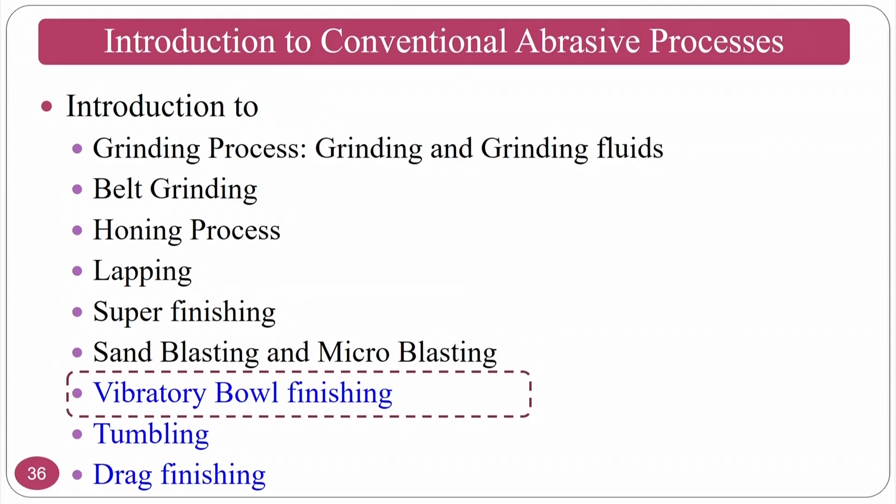The next process we will study is vibratory bowl finishing. This combines abrasive machining with mass movement of abrasive media. It's a mass finishing process where you dump parts in a batch—say 50 or 30 parts as per requirement—then give motion to the machine. Abrasive machining is taken in a mass spectrum, altering the peaks and valleys of the surface, thereby altering the surface finish of the workpiece, essentially shearing the workpiece peaks.

At the same time, it sometimes burnishes as well. So there are two options: it can shear off the surface peaks, or if the peaks are very small, it can do burnishing instead. Using abrasive medium and vibrations, you get a better surface finish in the vibratory bowl finishing process.

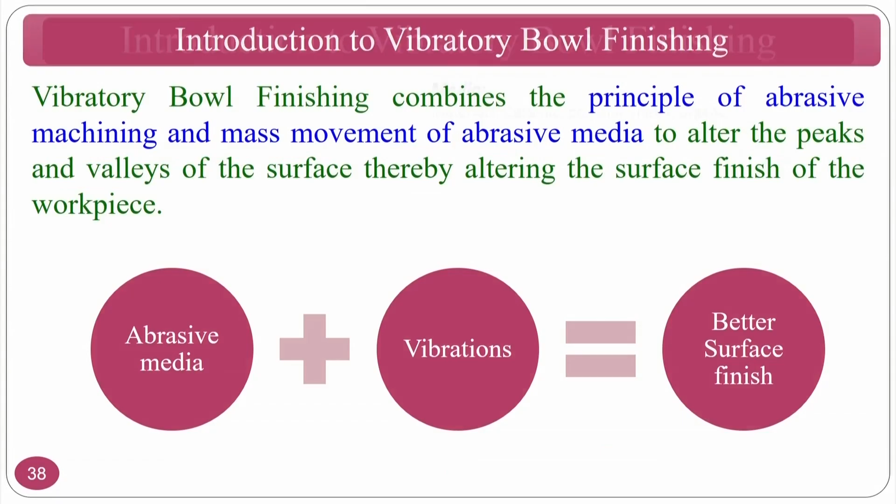A vibratory bowl finishing machine is an open top tub, round or oval bowl mounted on springs, usually lined with polyurethane, containing the work. This coating inside will normally be polyurethane, because polyurethane is a soft polymer.

Even though the workpieces are harder, if you have a metallic surface there would be chances of dimension changes at a nano or micro level. The media normally uses materials like ceramic, polymer, or metals, or organic, in shapes like cylindrical, pyramidal, or triangular, sized up to 25mm. For example, ceramic or metal particles of cylindrical shape up to 25mm can be used as the medium—these are the particles used inside the vibratory bowl finishing process.

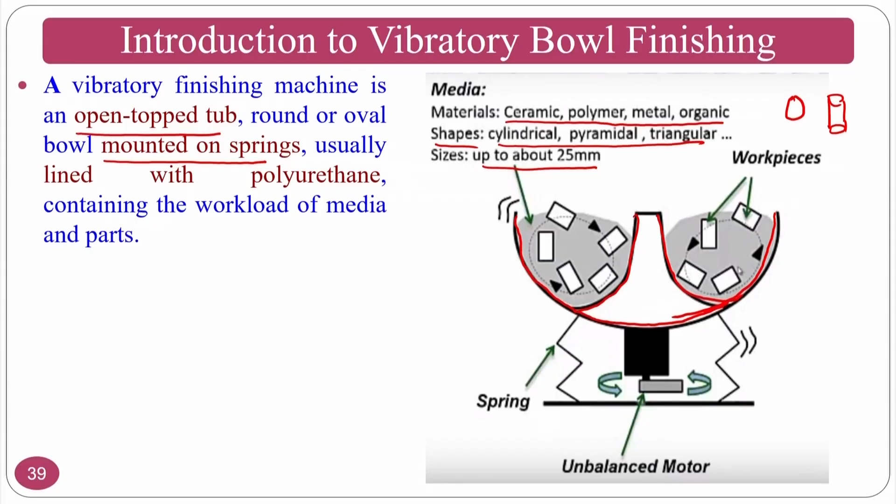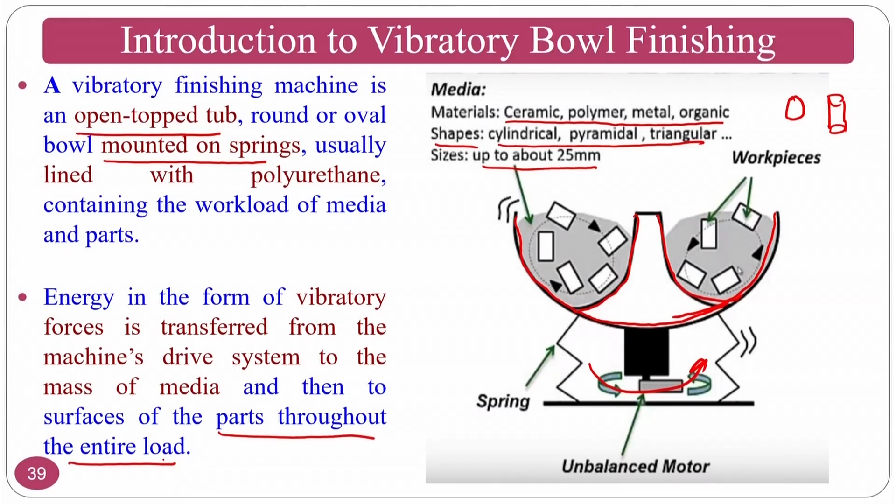Energy in the form of vibratory forces is transferred from the machine drive system to the mass media. The drive system here rotates, and this energy is transferred to the media, and through the media to the entire load of workpieces. These abrasive particles continuously indent and try to shear with respect to the vibrations given to the bowl. The abrasive particles carry and gain this energy, hitting the workpieces and shearing the surface peaks to achieve a better surface finish.

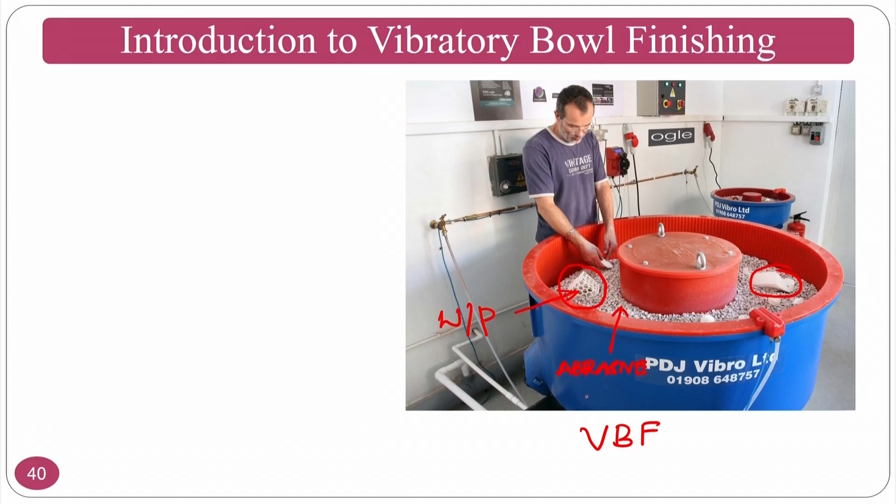This is how the vibratory bowl finishing process setup looks. These are the components placed here, these are the abrasive particles, and these are the workpieces.

Vibratory motion is induced by an eccentric weight system mounted on the drive mechanism—you will see this in the upcoming slides. Normally there is a weight system at the bottom, with the eccentric weight system below, and on top of it vibratory motion is given. By adjusting the degree of eccentricity—the amplitude—and the drive speed, that is how much speed or frequency, you can shake the vibratory bowl and transfer these vibrations to the particles, then to the parts.

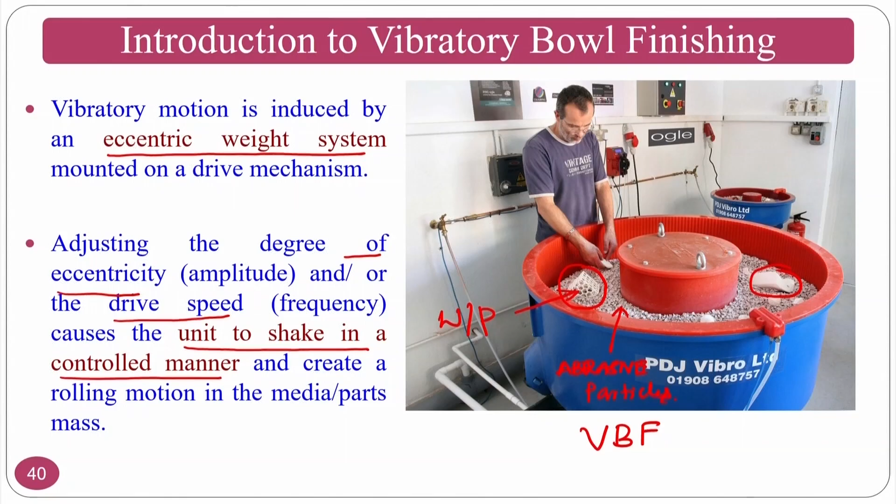In this machine tool, you can see the polyurethane here, the second part here, and the third part slightly below. The polyurethane lining is normally a high quality elastomer polyurethane, because the workpieces should not get hurt by metal or ceramic. If you coated this liner with metal instead of PU, it would damage the components because the interaction forces would be very high when rotating at very high speeds.

Normally the vibrational motor operates slightly off-center due to eccentricity. It has a direct drive steel cased motors, especially imported bearings, and an external lubrication system with high level performance. Normally the vibration motor gives the rotary vibrational motion.

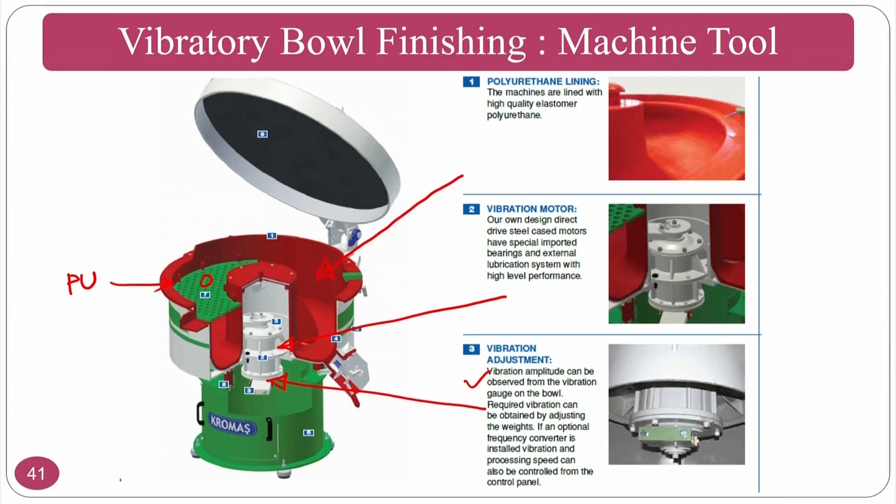At the same time, the vibration adjuster is used for changing vibration amplitude. If you want to change the vibrations or load and other things, you can go for this adjusting system.

In the other machine parts, normally the bowl, before coating inside, will have a heat treatment on the metallic component. On top of it you will have a polyurethane coating. This is the area where the polyurethane coating is done inside, and shot blasting is also done on this, because all metal surfaces are shot blasted for added strength.

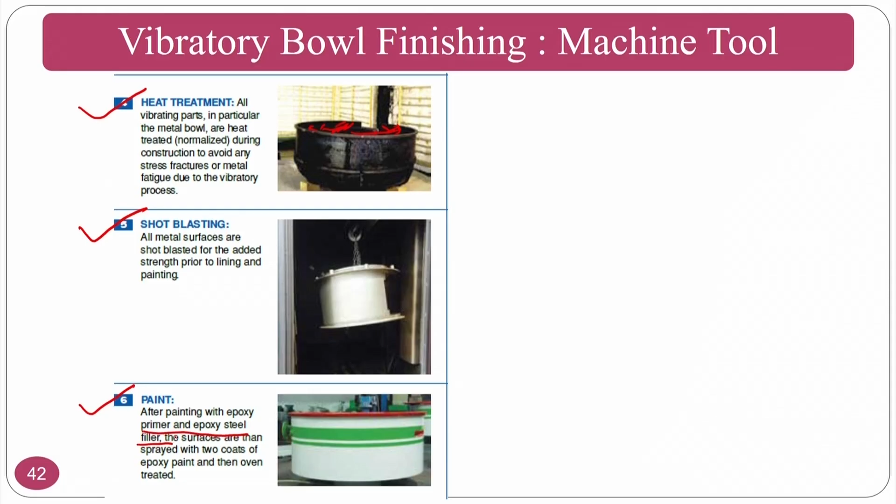Normally, if heat treatment alone is not sufficient, then you have to do sand blasting or some other blasting so that it gains more strength. At the same time you have to go for proper painting with epoxy primer and epoxy steel filler and other things, so that it gets a soft touch for the components that are moving or hitting the surfaces. On top of it you go for many other coatings and things.

At the same time, a suspension system is required because you are always dealing with vibrations and other things, and you require this suspension system.

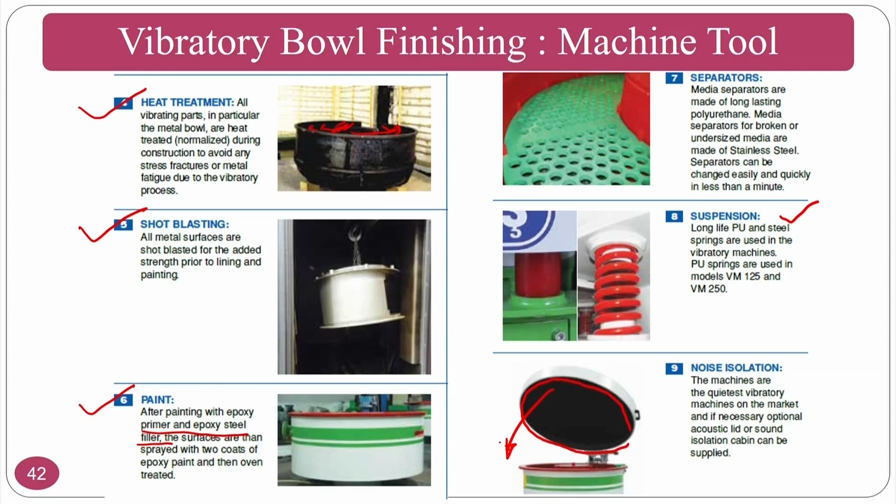And noise isolation—you should go for noise isolation like a very closed system, so you can do the closing. Noise is one of the major drawbacks of this vibratory bowl finishing process. If you close the system, the noise generated by the vibrating or moving particles can be minimized.

So if you see these operations, these are normally all the components that are finished using the vibratory bowl finishing process. Commonly it is used for cleaning applications, deflashing of components, and conditioning of castings and moldings, because the molds need very critical surface treatment. If you put these inside the vibratory bowl finishing process, the abrasive particles reach every nook and corner of complex molds and create a good surface on top.

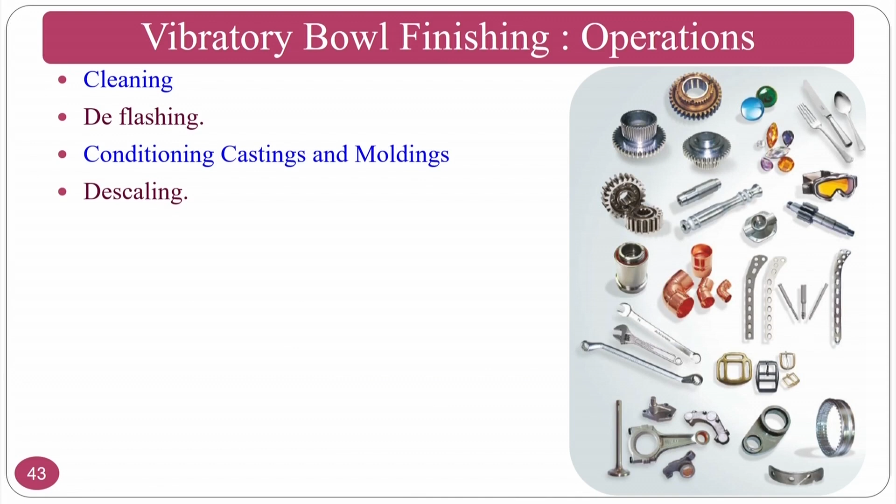Descaling can be done if there are any scaling problems, and removal of rust and brazing residues can also be done.

And burr removal—if you have any burrs after machining operations like drilling or milling, you can remove these.

Generation of radii, material removal, and size reduction can also be done. If I want to generate some radius because sharp edges are difficult to handle—a sharp edge component may damage my fingers—for that purpose you can generate a radius so the component is easy to handle.

Surface finish—obviously this process is normally used for mass finishing, meaning surface finishing of many components or varieties of components in one go, and normally this is done for batch production.

And improvement of burnishing preparation—if I want to do a burnishing operation, you can do a pre-burnishing operation using vibratory bowl finishing so the burnishing is easier later. Polishing of plated parts and silverware can also be done. At the same time, developing lubricative surfaces like honing—the lubricating surface crosshatch patterns generated in honing can also be generated by this process.

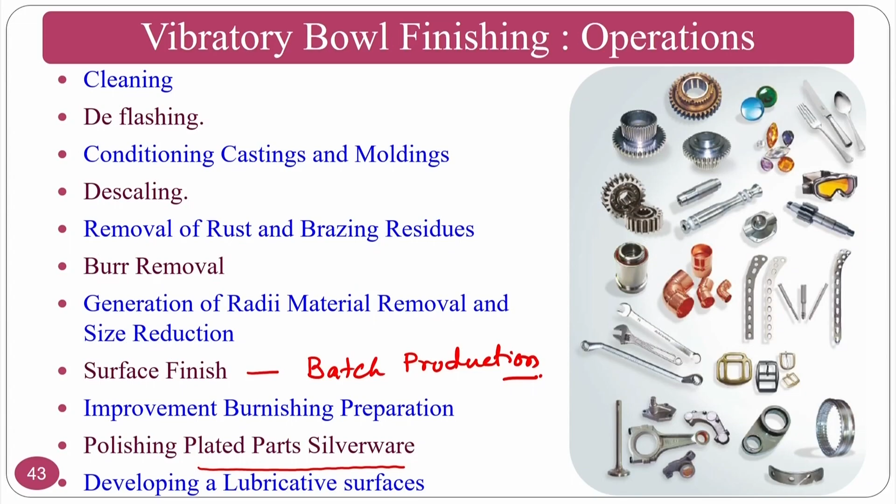Vibratory bowl finishing surface control: if I want to control the surface, the greater the speed or amplitude of the vibration process, the faster the material removal, but the surface roughness you get will be very rough.

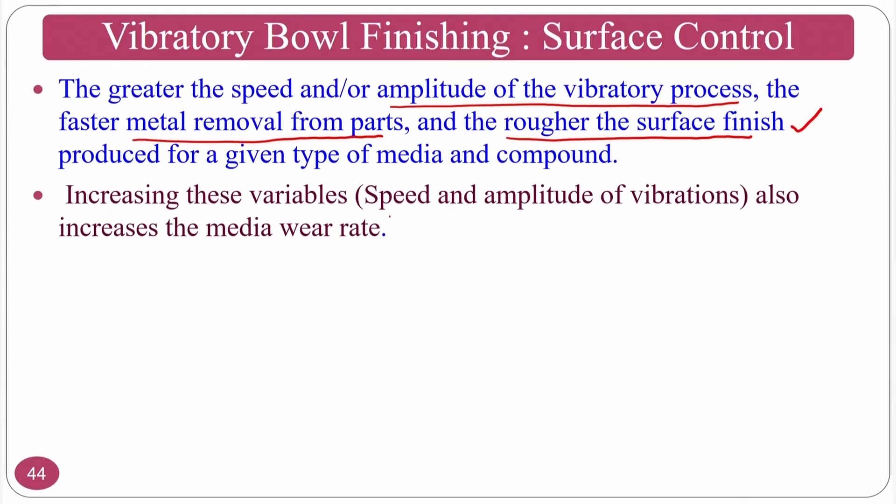So if I want to remove material or delaminate material, you have to go for higher speeds and higher amplitudes of vibration. The problem is you end up with a rough surface finish. It increases the variables—increasing variables like speed and amplitude of vibration also increases the media wear rate, meaning the particles you are using will also break.

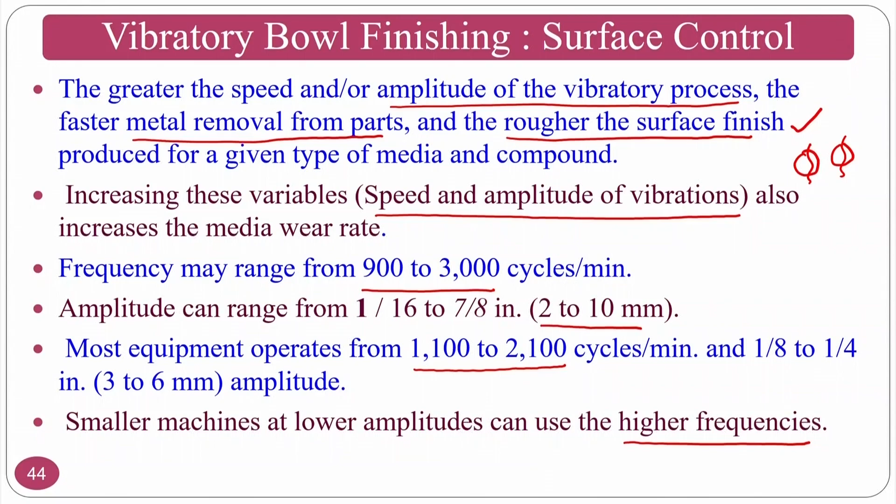Frequency may range from 900 to 3000 cycles per minute. The amplitude can range from 2 to 10 mm vibrational amplitude, and most equipment operates from 1100 to 2100 cycles per minute, with 3 to 6 mm vibrational amplitude normally. Smaller machines at lower amplitude can produce higher frequencies. So if you want higher frequency with lower amplitude, you can purchase small equipment, meaning small vibratory bowl finishing processes.

Media to parts ratio - there are varieties of parts, so that means media to parts ratio. If it is 0:1, that means only parts are there, so there is no media. In that circumstance, part to part touch will occur, used for beating off the burrs, and no cutting action will take place, only burnishing will occur.

If I want to get a burnishing operation on top of a workpiece, you have to go for 0:1. If I want to go for 1:1, that means 50% abrasive particles and 50% workpiece materials or components, equal volumes of media and parts, and sand casting results in very rough surfaces.

If you go for 2:1, that means 2 times the abrasive particles compared to the workpieces, it will give still severe part contact, so it is also not preferable.

Whenever you go for 3:1, there will still be considerable part to part contact, and it is fair to good for metallic surfaces like ferrous materials, iron based metals. For 4:1, it is good for ferrous surfaces, and normally you will achieve fair to good surface finish.

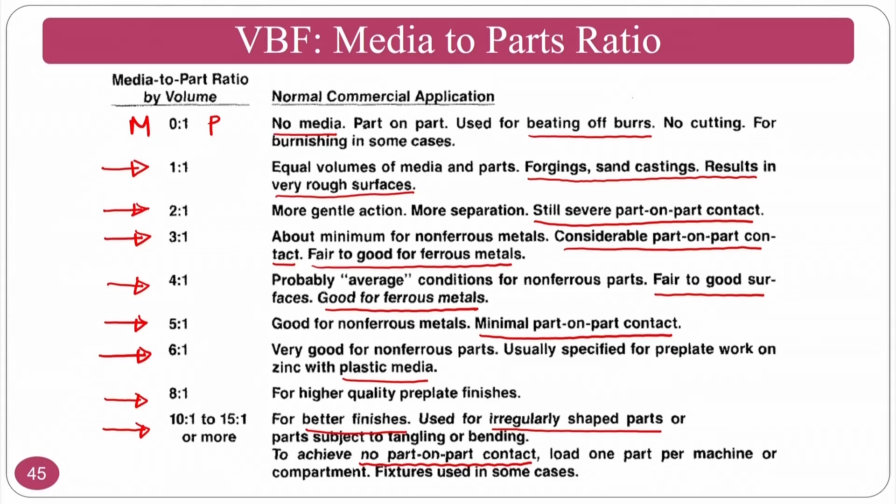That means if you want to go for finishing applications, you have to go for this region, and if you want to go for machining or burnishing, you can go for this particular region. So you have to always decide what you want to do.

If I want to do machining only, or deburring only on surfaces, then you have to go for ratios like 5:1, meaning 5 times abrasive particles to 1 time workpieces. And if I want to go for finishing, then you have to go for 8:1 or 10:1 or in the range of 10:1 to 15:1. Then you can even go for plastic type media, and get very good surface finishes.

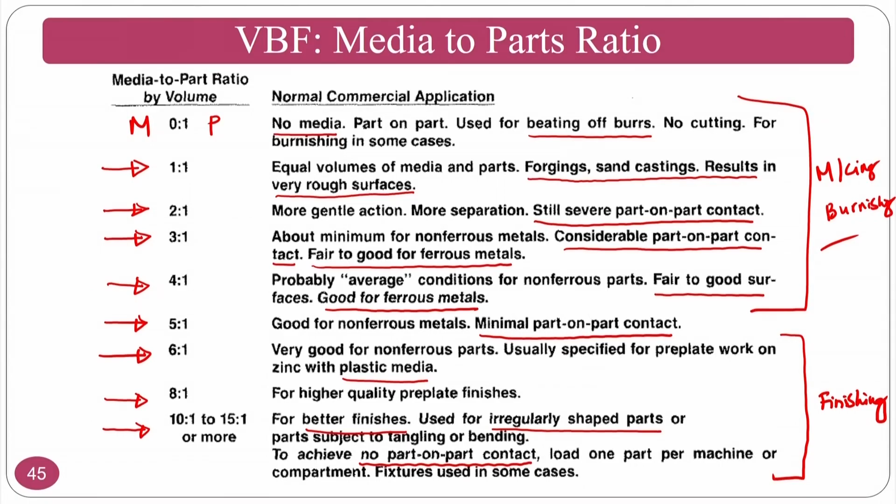So the abrasive media - normally there are two types of abrasive media. One is natural media, the other is synthetic abrasive media. The natural media includes random shapes of granite, limestone, Turkish emery and American emery. These are river rocks, novaculite, flint, corundum - these are natural aluminum oxide. These are things available in nature, so you can get them at economic price, from nature also.

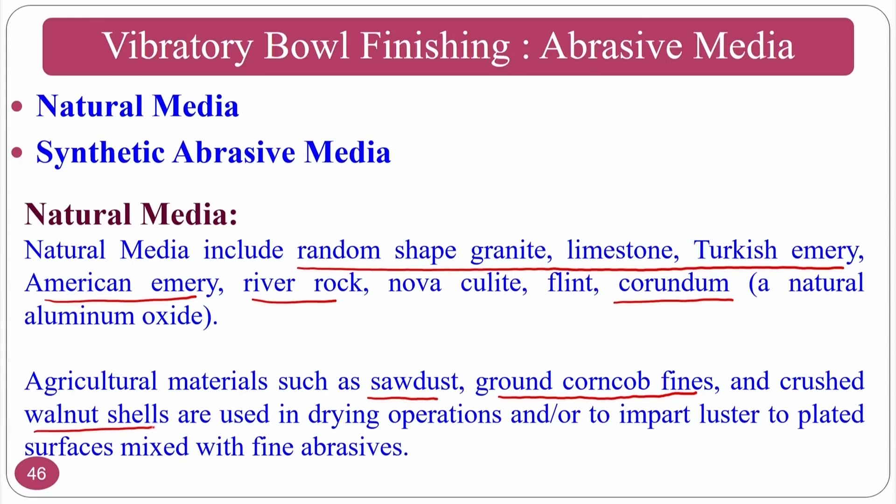Agriculture materials such as sawdust, ground corn cob fines and crushed walnut shells are also used for these purposes, and these are all economic. Walnuts or similar nuts, whenever you eat them, the shells are waste. So you can develop abrasive particles from them since they are very brittle. You can ball mill these walnut shells, or crush them, and use them for applications like texturing or removing burrs, or texturing on very soft materials.

In synthetic abrasive media, fused and sintered aluminum oxide medium nuggets are manufactured at grades for cutting and for brightening applications. If people want surface finish and good appearance, you can go for sintered alumina and other abrasive particles.

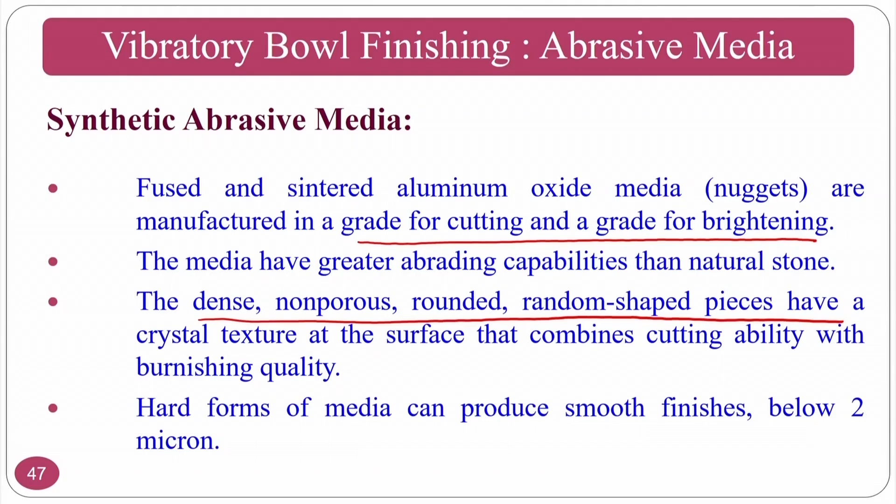The media have greater abrading capability than natural stone. Silica, granite, and similar particles have much less hardness compared to aluminum oxide, so its capability is much better compared to granite, walnut flakes and other things. The dense, non-porous, rounded, random shaped pieces have a crystal texture at the surface that combines cutting ability with burnishing quality, and hard forms of media can produce smooth finishes below 2 microns. This means you can use this process for pre-finishing and advanced finishing applications.

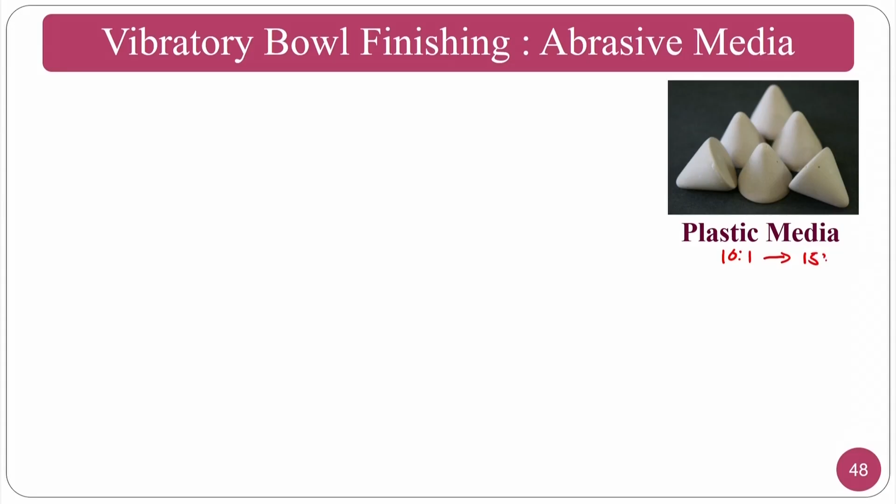Now, the abrasive medium - plastic media can also be used here. As I said, normally if you are going for about 10:1 to 15:1, you can go for this type of plastic media.

Low density plastic media, normally resin bonded, contain a fine silica flour or aluminum oxide, polyester resin and catalyst, because you always require some catalyst to achieve functionalization and proper bonding between your abrasive particle and the resin. Resin has a different chemical composition and the abrasive particle a different elemental composition, so to get good adhesion between these two, you need to go for some catalyst.

The media are molded into specified shapes, then pre-tumbled to remove flash. Urea formaldehyde plastic media contains abrasives, urea formaldehyde resin and acidic catalyst. These media are molded to various shapes and specifications so that they cut faster, wear longer, produce fine finishes, and avoid creating foaming problems.

So if you want to do these things, what do you have to do? Take the abrasive particles, urea formaldehyde, and acid catalyst, mix it, and mold it to a particular shape - a shape such that it cuts faster and doesn't wear out earlier. These are the two major causes by which you decide the shape to fabricate.

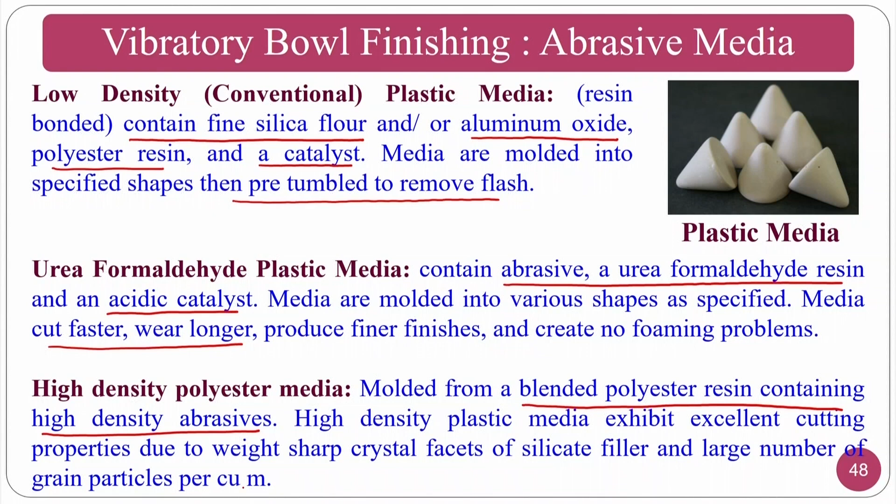The high density polyester media is molded from blended polyester resin containing high density abrasives. High density plastic media exhibit excellent cutting properties due to weight, sharp crystal facets of silicate filler, and a large number of grain particles per cubic metre. In these circumstances, you have high density of abrasive particles and high density polymers blended along with catalyst, and material removal will be very fast because your particles are high density at the same time your polymer is also high strength.

In the abrasive medium, ceramic media is manufactured from clay as well as other ceramic materials mixed in various quantities - abrasive particles mixed with clay. If you look at grinding wheel specifications, vitrified bonding is made up of clay, and you can do similar things here. You take abrasive particles, mix them with raw material clay, and mold as per different shapes - triangular shapes for instance. Instead of a big grinding wheel, you can make small particles and do this. Here the surface area is very high, so the wear rate will be very low.

The media properties are determined by the proportion of abrasive to bonding material. Normally, if abrasive percentage is more, you get a dense structure, and a dense structure gives higher material removal. If the structure is open, meaning fewer abrasive particles, the material removal rate will be very less. The type of bonding material, type of abrasive, abrasive particle size, and degree of firing also play a major role in terms of material removal.

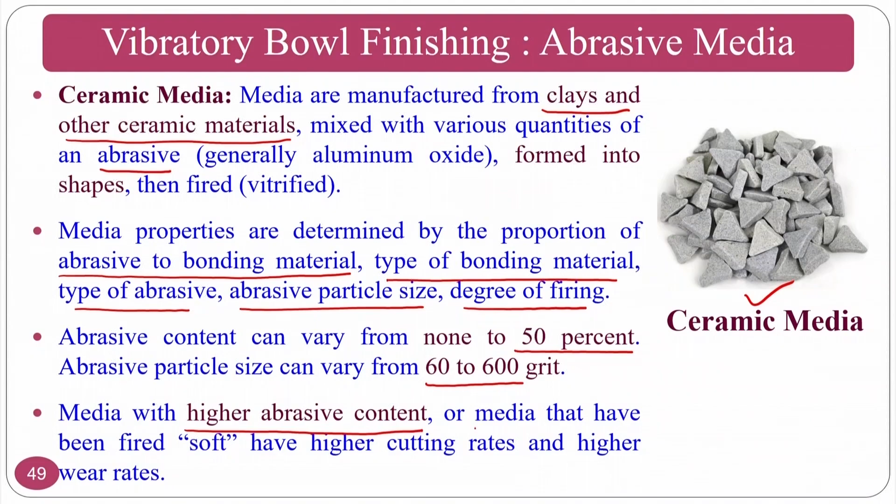Media with higher abrasive content, or media that have been fired soft, will have higher cutting rates, and wear rates will be very high.

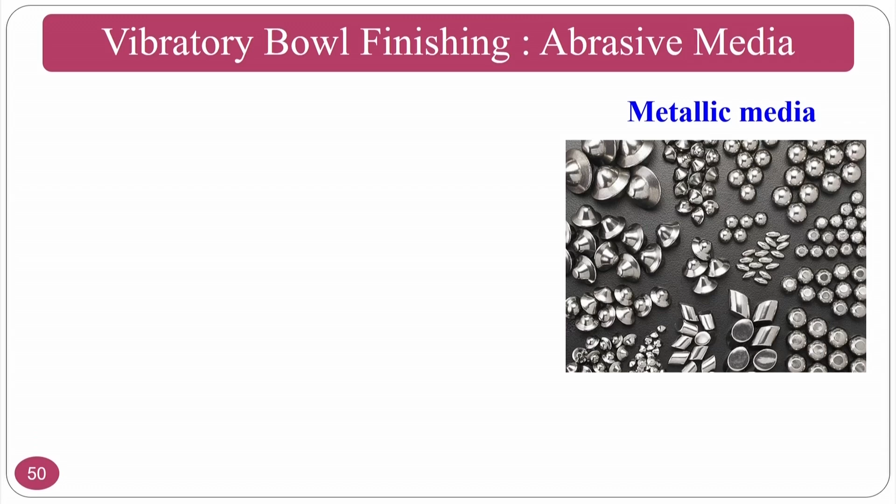The medium, normally now we are moving to metallic media. We have seen polymer media, natural media, synthetic media. Among the synthetic media, we have seen polymer synthetic medium, then the ceramic synthetic medium, and now we are coming to the metallic medium. These are performed for metallic media case hardened steel.

Through-hardened steel, zinc, cold rolled steel are among the materials used for manufacturing metallic media. That means hardened steel is commonly used for this metallic medium, performed uniformly. Hardened steel and stainless steel media are used for deburring applications.

As I said, if you have a structure, assume that I want to make this hole, this type of channel in a surface. So if you have burrs here, these are the burrs. What will happen if I want to remove all these things? You have to use this type of particles.

Assume that whenever you do the drilling operation from one side to another side, what will happen? You will have burrs, so unremoved chips will be there. These are nothing but the burrs. So you can use this for the deburring operation.

For metallic parts and certain plastics, you can also apply deflashing, and cleaning of ceramic forms, removal of both organic and inorganic soils, burnishing or brightening of metal. Sometimes if you see these particles, these metallic particles are very shining, so this will have good surface roughness.

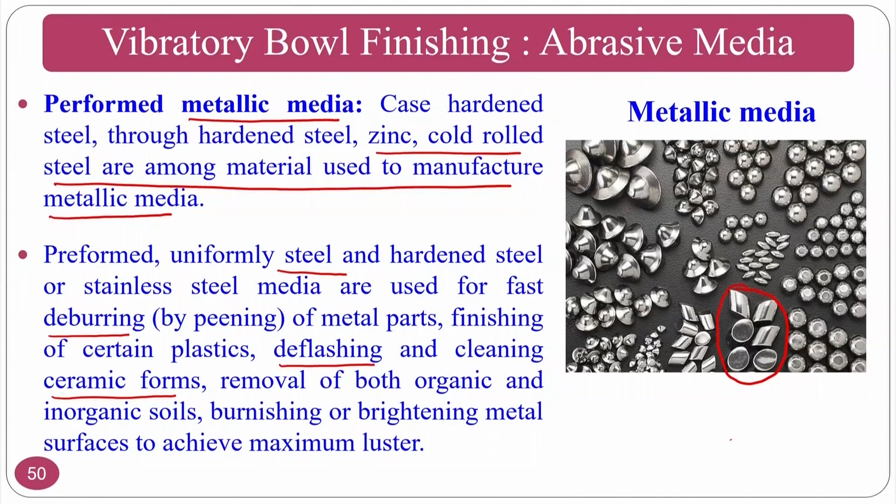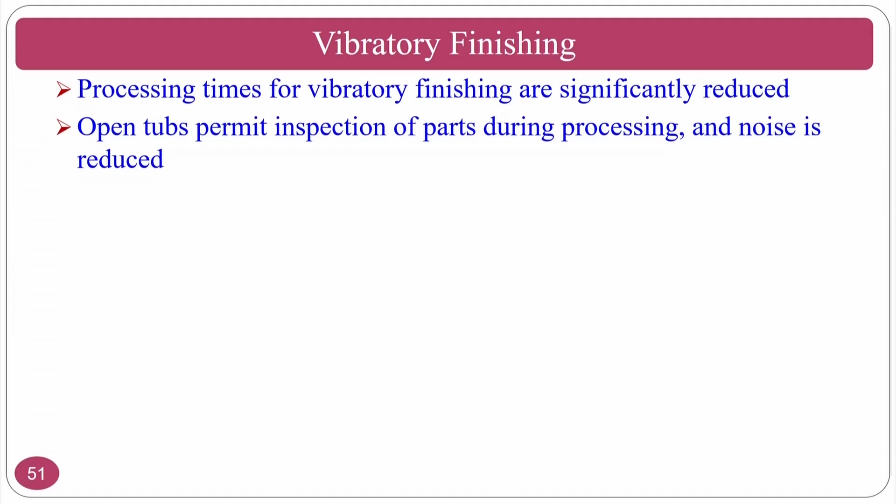Vibratory finishing process. These process times for vibratory finishing are significantly reduced, and open tubs permit the inspection of the parts during the process. The advantage of this process is that it is an open tub, so you can see from the top. If closed, you can have a transparent one like perspex, so that you can have visual inspection.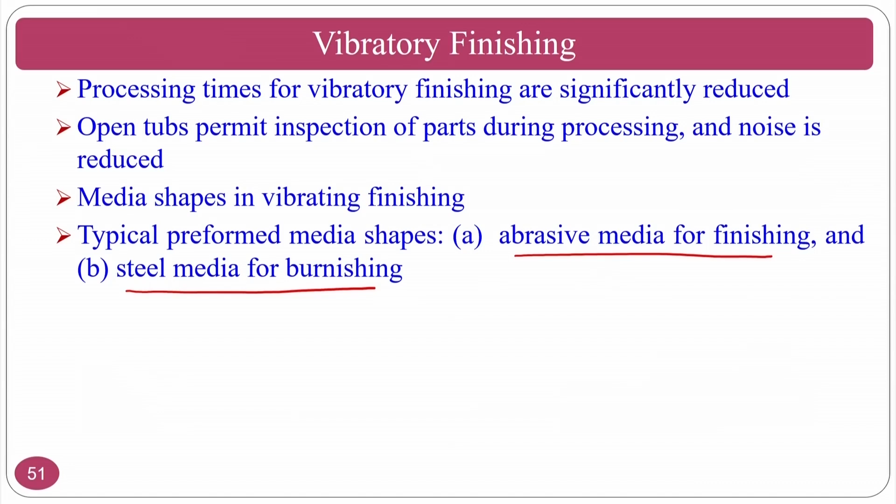Media shapes in vibratory finishing are typically preformed shapes: abrasive media for finishing, and steel media for burnishing. As I said, the steel media will be used for burnishing operations, so the surface will be hit, causing the peaks to deform, and burnishing action will take place.

And these are the shapes: sphere shapes, star type, arrow type, cone, pyramid, angle cut cylinder, ball cone combined shapes, oval ball, and pins.

These are the different shapes that you are going to use, and you have to think of two aspects when designing these particular shapes. One, material removal - how much material removal if I go for a particular shape. Second is the life of this particular shape or grinding particle. What will be the life if you use this? Can it last for 1000 parts? Can it last for 1 million parts? Can it last for 10 million parts?

Can it remove material in half an hour? Can it remove in 1 hour? Like that, you have to think in these two aspects whenever you want to decide the shape of these vibratory finishing abrasive particles.

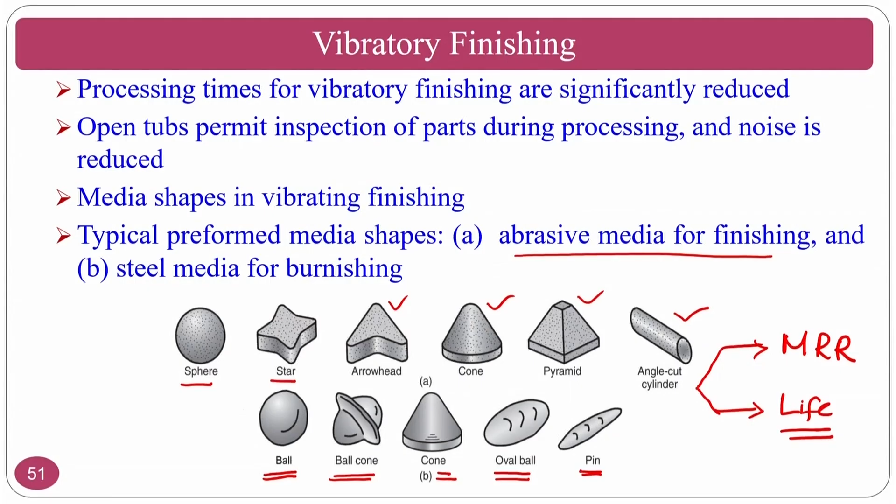Abrasive media selection: if at all I want to go for the deburring operation, for light deburring, steel or ceramic can be referred, and for medium to heavy deburring, ceramic or plastic can be referred.

For radiusing applications, assume I have a sharp edge and I want to reduce it to a rounded shape. For light to heavy radiusing applications, you can go for ceramic or plastic.

For surface improvement, reducing surface roughness and producing a quality surface, you have to go for plastic or ceramic, or a combination of plastic and ceramic.

For surface reflectivity, meaning if I want to generate a shiny surface, for that purpose steel or ceramic can be used. For brightened or highlighted, best quality surfaces, you can go for ceramic type.

For clean surfaces, if I want to go for all metals, I can use steel or ceramics or random shaped aluminum oxide. You can also go for irregular surfaces. This is how one has to select the abrasive medium.

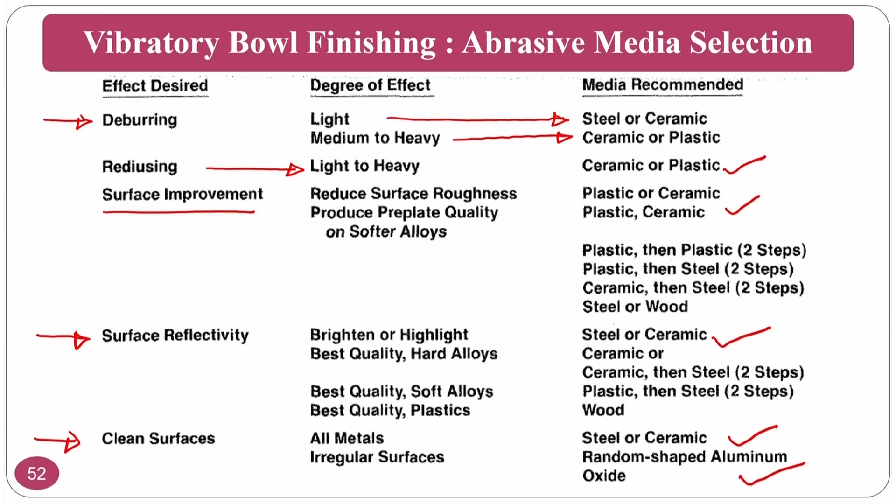Abrasive media compound: the compounds are normally liquids or powders that may be used in the finishing machine, generally in one of 3 ways.

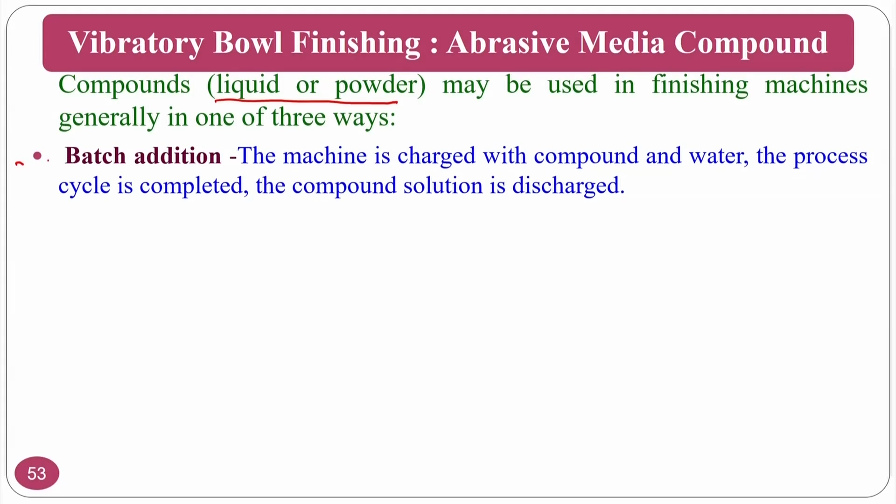Batch addition: compounds are added, the machine is charged with the compound and water, the process cycle is completed, and the compound solution is discharged. Normally, if the machine is charged with compound and water, once the process is completed, it will be discharged.

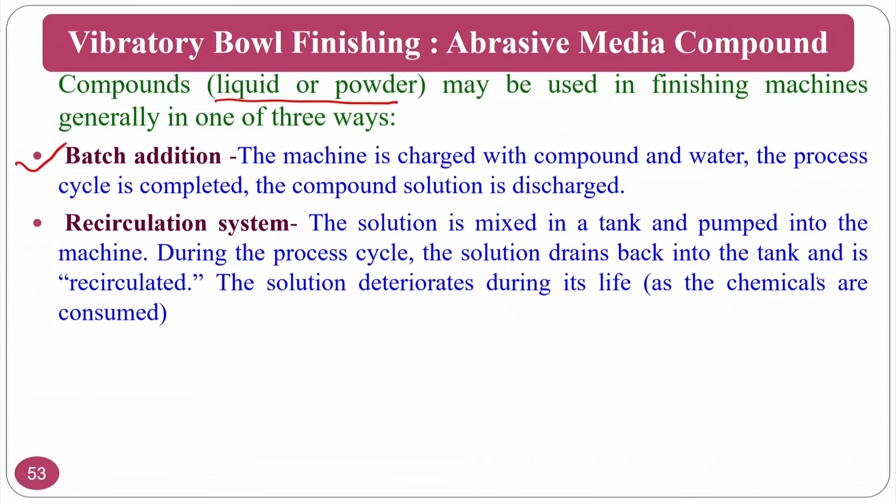In the recirculation system, the solution is mixed in the tank and pumped into the machine. During this process cycle, the solution drains back into the tank and is recirculated. This solution deteriorates over its life.

At the same time, the flow through system is designed for continuous addition and draining of the solution. Fresh non-abrasive compound solution is pumped into the machine at a predetermined flow rate, and flows through the mass, drains continuously and is discharged.

What I mean is, for the abrasive media compound, you have to continuously supply this compound so that any abrasive chips generated can be drained out.

At the same time, if I want to give some lubrication to the parts while doing the finishing operation, you can use 3 methods. One is batch addition, where compound or liquid is added along with the water—assume I have mineral oil along with water, I can add it after 1 hour or so; that is called batch.

In the recirculation system, you continuously pump this liquid and continuously recirculate it using a filter system. At the same time, the flow through system continuously adds and dispenses these compounds.

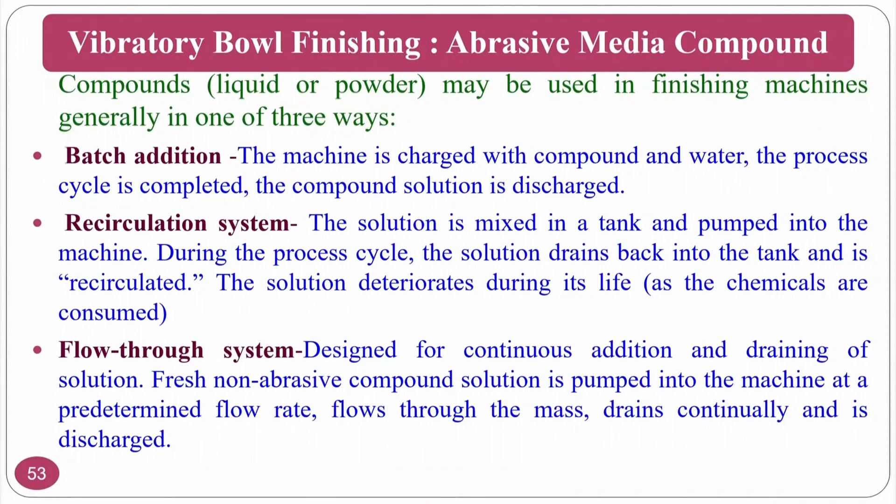Compounds may be selected to perform some functions, like conditioning the water and controlling the pH of the wet surfaces. Normally, whenever you do finishing of bio implants and other things, you have to control the pH on the surface, and for that purpose you have to use the compound.

Also, cleaning the parts and keeping them continuously clean, because if some surfaces are sheared or burnished, then you have to do the cleaning operation. Assume the peak gets deformed into the valley—that will create a lot of problems when you go and use it for certain applications.

Separating and cushioning parts against damage if required, and controlling foam. What I mean is, cushioning the parts because sometimes parts are hitting against each other inside, since it is a random process, a mass or batch process. So if I am pumping in this type of liquid or compound, there will be a cushioning between the components.

Remove the tarnish or the scales—if there is any scale formation due to the abrasive or due to part-to-part contact, you can remove it. Also, the compound can help control the color of the part, so the color of the part can also be improved.

Suppose if at all I want to put certain colors, you can add along with this compound. So assume that I want to add a green color along with this compound, so that the particles also will become slightly green. At the same time your components also may become some green color.

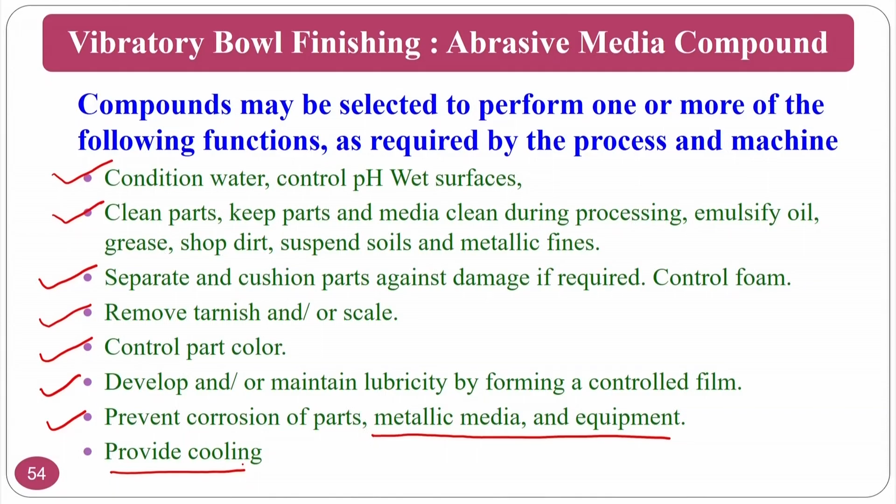The compound also develops and maintains lubricity by forming a film, at the same time preventing corrosion of the metallic media and equipment, and providing cooling. Most importantly, there will be temperature generation depending on the amplitude and the velocity at which you are rotating. There is a lot of possibility for temperature generation, so for that you can cool it. That's why water plus lubricant plus other rheological additives will be added, so that you can overcome some of the problems in the vibratory bowl finishing process.

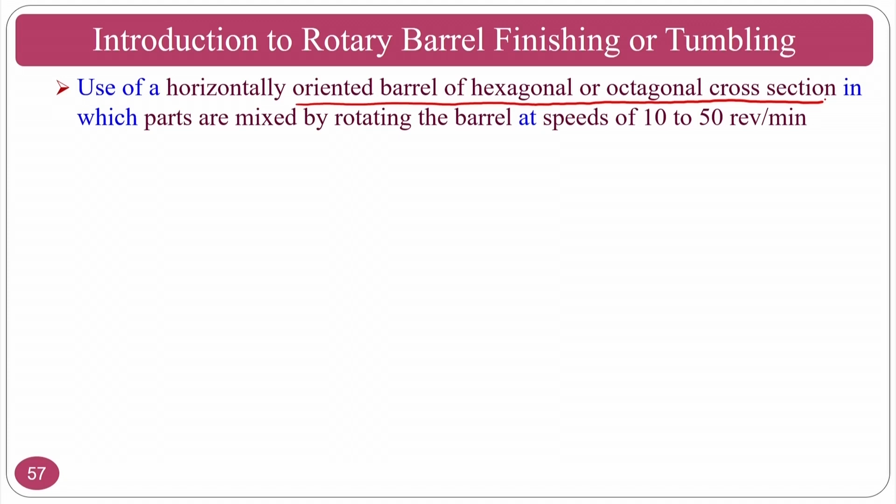So the next one we are going to see is the tumbling process. The other name for the tumbling process is the rotary barrel finishing process. In this process, a horizontal oriented barrel of hexagonal or octagonal cross section is used, in which parts are mixed and the barrel is rotated at speeds normally 10 to 50 revolutions per minute. Normally, this finishing is done by landsliding action.

In the previous process, the vibratory bowl feeder would be rotated like this. In this one, you will have landsliding. Media and parts are raised in the barrel as it rotates, and the top layer tumbles down due to gravity. Normally, you can see here this is the landsliding type.

So this type of thing is moving. Once it reaches the top of the barrel, it moves down, and this looks like a landslide. The medium, parts, and abrasive particles are mixed here, similar to the vibratory bowl finishing process. You add them here and rotate the bowl. Whenever you rotate the bowl, whichever particles are at the top level will slide down to the bottom. So this action looks like a landslide.

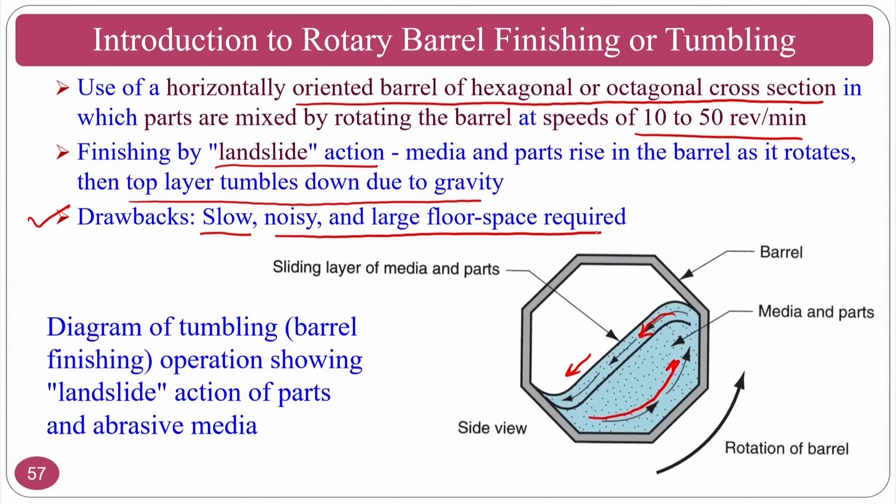The drawbacks of this particular process are that it is very slow, noisy, and requires a large floor area space. Basically, it creates a lot of noise in the manufacturing area. So you can have a separate, noise-proof room, and run these multiple machines while controlling them from outside.

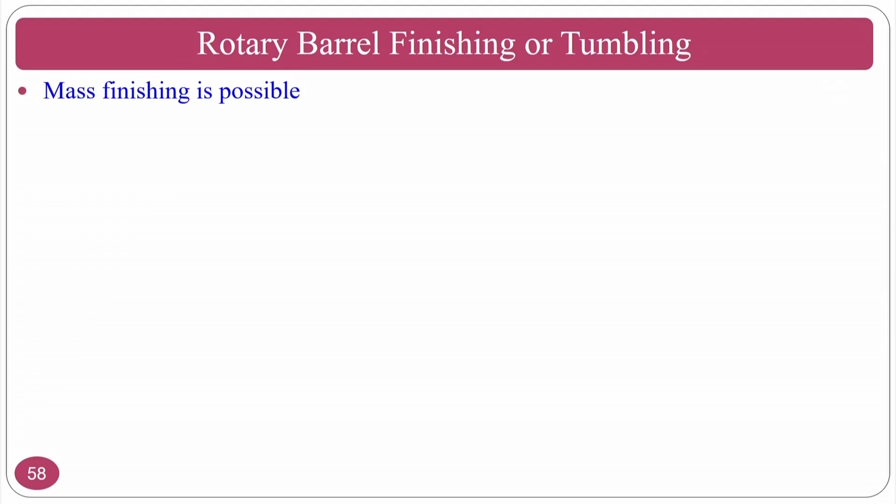Rotary barrel finishing is normally used for mass finishing applications. At the same time, it is good for shaping but difficult to achieve controlled finishing processes. There is also non-uniform finishing due to random contacts, because the abrasive particles randomly impinge on the components, so you get random surfaces.

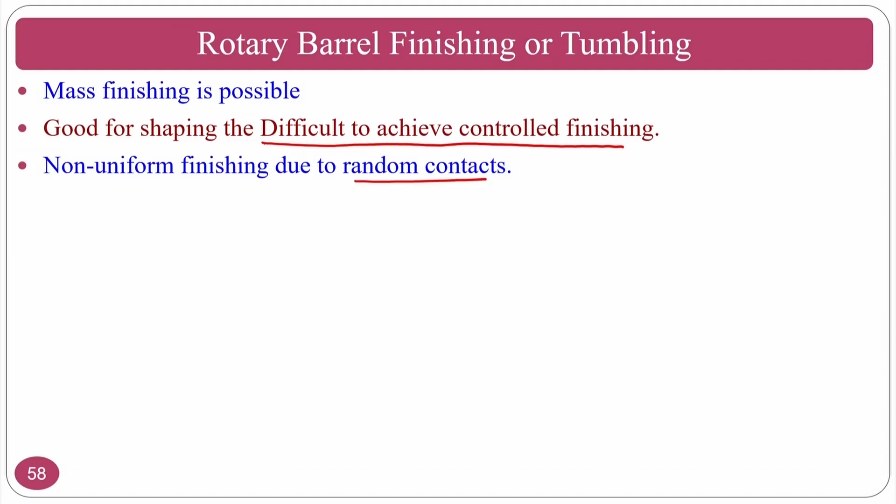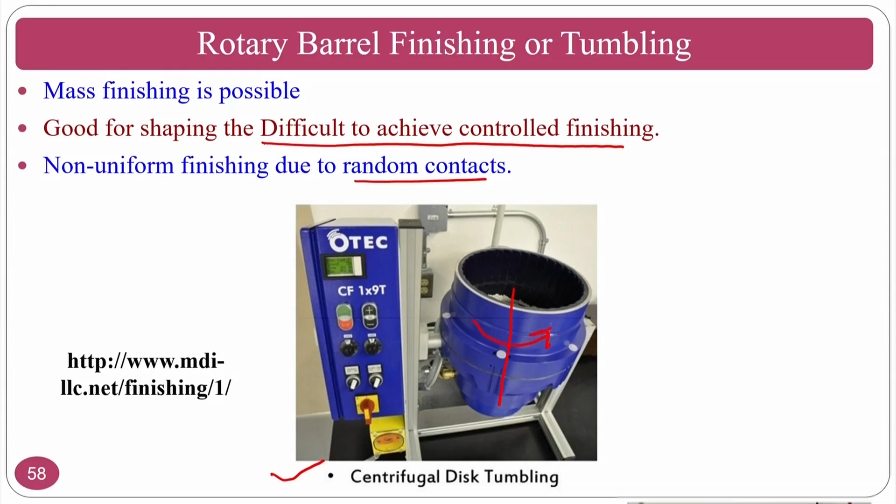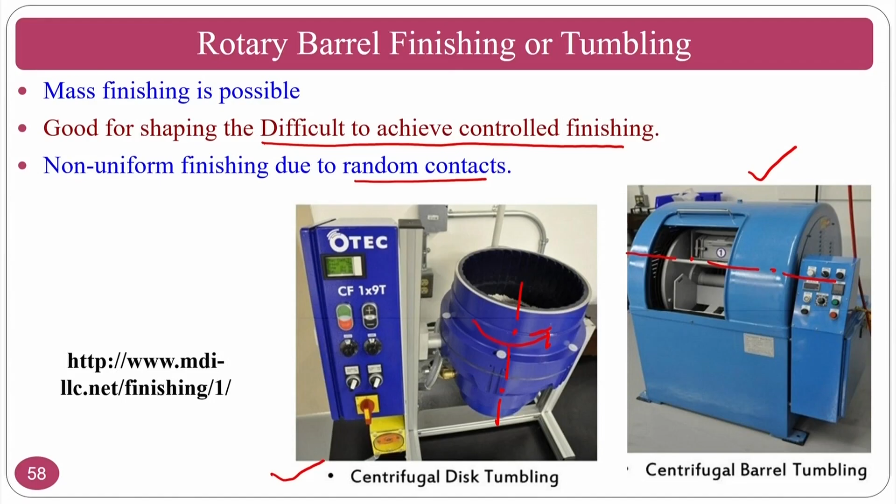The first variety of this is the centrifugal disc tumbling process, which has a vertical axis about which it rotates, so that all parts and abrasive particles are rotated. The other version is the horizontal type. One is vertical, rotating about the vertical axis, and the other is horizontal. Some components are better suited to the vertical type, some to the horizontal type. Normally, landsliding and other actions are common for the horizontal type, which is the centrifugal barrel tumbling process. In centrifugal barrel tumbling, as I said, the axis is horizontal.

So in summary for this class, we have studied vibratory bowl finishing and tumbling, and we will see some conventional finishing processes or conventional abrasive machining and finishing processes in the next classes. In the upcoming classes we will see the drag finishing process, which can overcome some of the drawbacks of the tumbling process.

In tumbling, as seen in the previous slide, you have a vertical tumbler. If you rotate it, all the parts on the periphery of the tumbler will rotate at very high speed, while those at the center may not rotate or travel much distance. This means the surface roughness will vary from the outside surface to the inside surface, and this is a drawback. To overcome this and get a uniform surface, there is another process called the drag finishing process, which we will see in the next class.